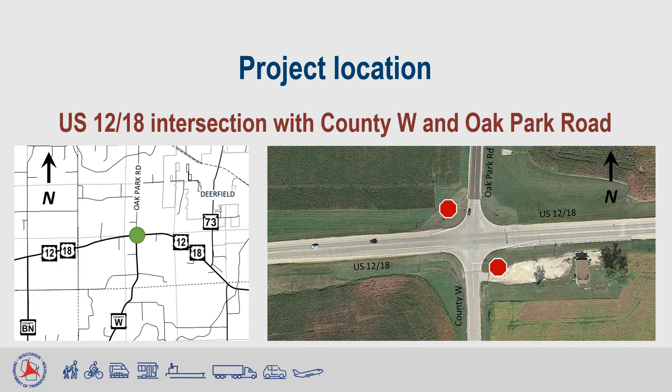The posted speed limit is 55 miles an hour on US 12 and 18 and County W. Oak Park Road has a posted speed limit of 45 miles an hour. The purpose of the project is to improve the safety of the intersection and the traffic operations. There were 16 crashes reported at the intersection from 2015 to 2020. 10 of these crashes resulted in injuries.

The majority of the crashes involved US 12 and 18 vehicles rear-ending vehicles waiting to turn left onto one of the side roads. Right-angle crashes between side street vehicles and vehicles on US 12 and 18 were also prevalent. Factors that contribute to these types of crashes are high speeds on US 12 and 18, failure of US 12 and 18 vehicles to stop for left-turning vehicles, and failure of vehicles on the side street to yield to traffic on US 12 and 18.

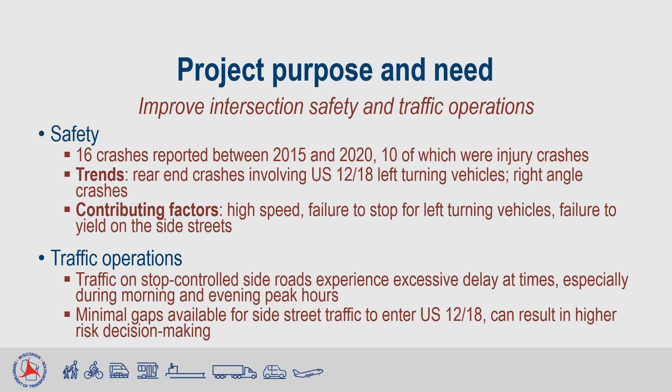In addition to the safety concerns, the intersection has poor traffic operations on the side roads. Vehicles stopped on County W and Oak Park Road are currently experiencing excessive delays at times, especially during the morning and evening peak hours, due to the amount of traffic on US 12 and 18. At these busy times, there are few gaps available for traffic from the side street to enter the intersection, and this can tempt drivers on County W and Oak Park Road to make higher risk decisions to turn onto US 12 and 18. This could also be another contributing factor to the high number of crashes at the intersection.

To improve both the safety and traffic operations of the intersection, the project team completed a study that evaluated 4 alternatives: no action, an improved two-way stop-controlled intersection, installing a traffic signal, and constructing a roundabout.

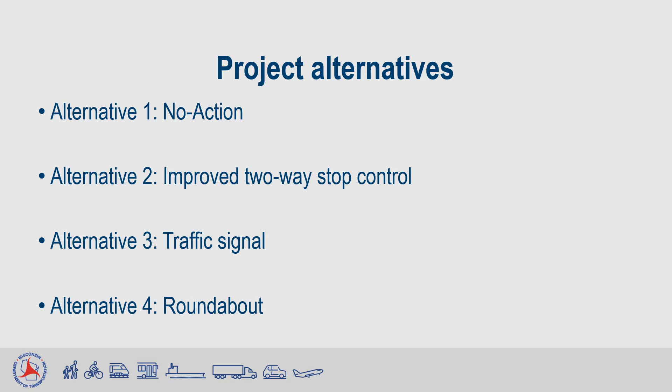The first intersection alternative is no action. If no improvements are completed, the US 12 and 18 and County W Oak Park Road intersection will continue to experience high crash rates with increased likelihood of injuries or fatalities. Congestion will also increase as traffic grows, which will result in longer delays and potentially risky decision-making. Taking no action will not address the identified safety and traffic operation needs of this intersection and is not preferred.

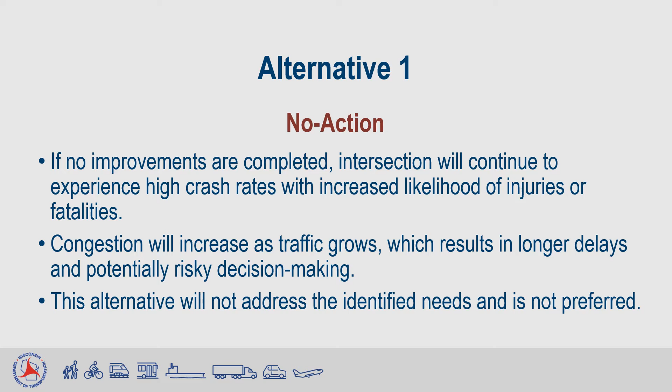The second intersection alternative is to improve the existing two-way stop-controlled intersection. This alternative adds dedicated left turn lanes to both approaches of US 12 and 18 and adds a dedicated right turn lane for westbound US 12 and 18, which complements the existing right turn lane for eastbound traffic. The improvements are estimated to cost $1.6 million.

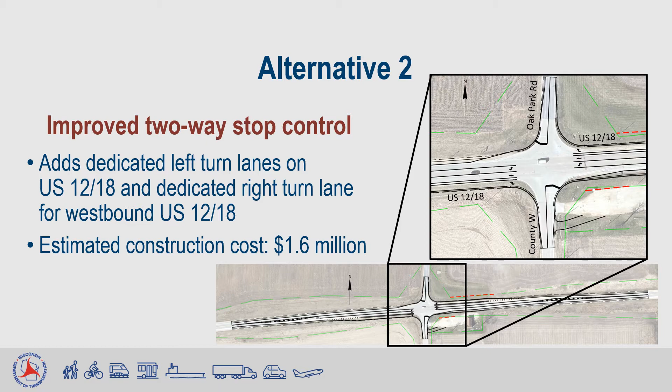Safety performance is predicted to improve for this alternative over the existing intersection configuration, particularly lowering the rear-end crashes. However, due to the high speeds on US 12 and 18, the severity of crashes is likely to still be high. Traffic on County W and Oak Park Road must still stop and will continue to experience high delays and poor operations, which may lead to risky decision-making.

The additional turning lanes on US 12 and 18 will also make the turning movements from the side roads longer, requiring larger gaps in traffic on US 12 and 18. The construction work required on US 12 and 18 to add the left turn lanes still results in a considerable construction cost. However, this alternative is the least costly of the improvement alternatives. The improved two-way stop-controlled intersection alternative does not meet the operational needs of the project and only marginally improves the intersection safety and therefore is not the preferred alternative.

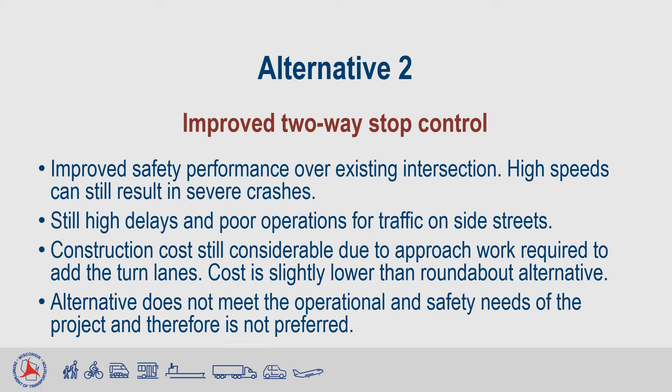The third alternative is to install traffic signals at the intersection. This alternative adds dedicated left turn lanes to all of the intersection approaches and dedicated right turn lanes to the US 12 and 18 approaches. A median is also added to separate eastbound and westbound US 12 and 18 traffic. The improvements are estimated to cost $3 million.

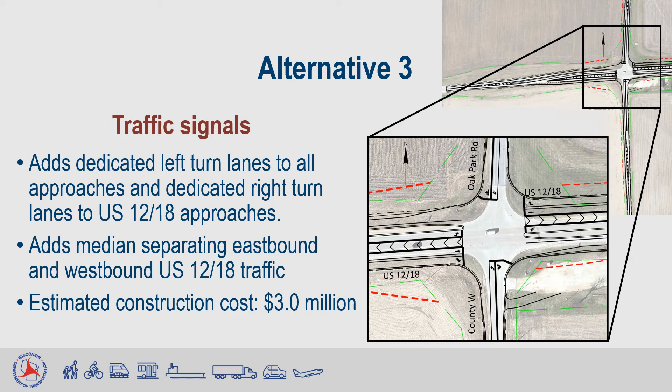With the addition of traffic signals and dedicated left turn lanes, the safety performance of the intersection is predicted to improve over the existing intersection. However, high speeds at the intersection could still result in severe crashes. The traffic operations, especially on the side roads, are also expected to improve over the existing conditions, but queue lengths are expected to be longer during peak periods compared to the roundabout alternative.

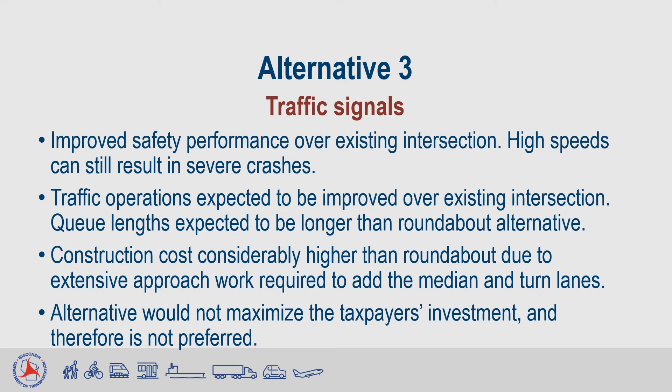The estimated construction cost of $3 million is considerably higher than the roundabout alternative due to the extensive work required on all four approaches to construct the left turn lanes and the median on US 12 and 18. The traffic signal alternative would not maximize the taxpayer's investment and therefore is not the preferred alternative.

The fourth alternative is to construct a roundabout at the intersection, which is the preferred option by Wisconsin DOT. The roundabout would consist of single-lane entries. Roundabouts eliminate right angle, or T-bone, crashes, and minor crashes often involve property damage only. Also, the geometry of the roundabout results in slower operating speeds for drivers, further reducing the severity of crashes.

Recent studies of Wisconsin roundabouts have shown that replacing a stop sign or traffic signal with a roundabout yields a 38% reduction in fatal and injury crashes. Reconstructing the US 12 and 18 and County W Oak Park Road intersection as a single-lane roundabout is estimated to cost $1.8 million.

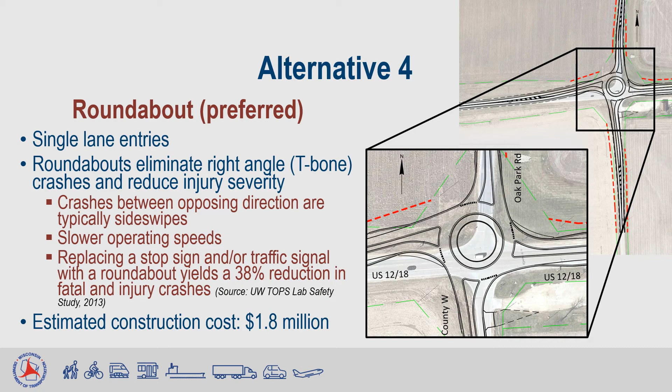With the installation of a single-lane roundabout, the safety performance of the intersection is predicted to improve over the existing intersection and with less severe crashes than the improved two-way stop or traffic signal alternatives. The traffic operations of the roundabout are also expected to improve over the existing intersection and with less queuing than the traffic signal alternative and less delay during the off-peak periods.

The construction cost for the roundabout is estimated to be lower than the traffic signal alternative. The roundabout alternative meets both the operational and safety needs of the project while maximizing the taxpayer's investment and therefore is the preferred intersection alternative.

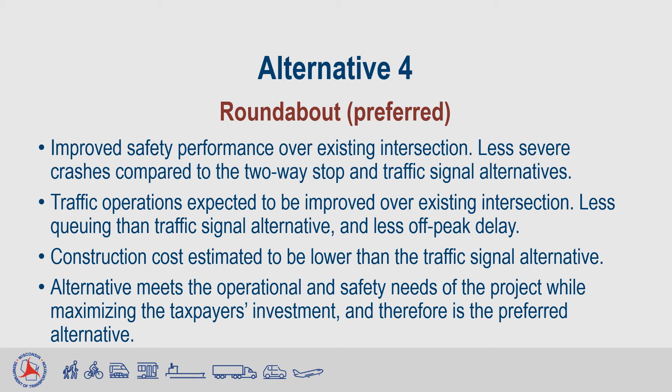Regardless of the selected intersection alternative, strips of right-of-way will be required from parcels near the intersection. Shown here in red are the approximate right-of-way needs for the roundabout alternative. The right-of-way requirements for the other alternatives are shown on the exhibits included on the project website.

The chosen intersection improvement will be constructed in stages, with US 12 and 18 to remain open during construction. County W and Oak Park Road will be closed or restricted to right-in, right-out access at times during construction. Access to local residences and businesses will be maintained throughout construction.

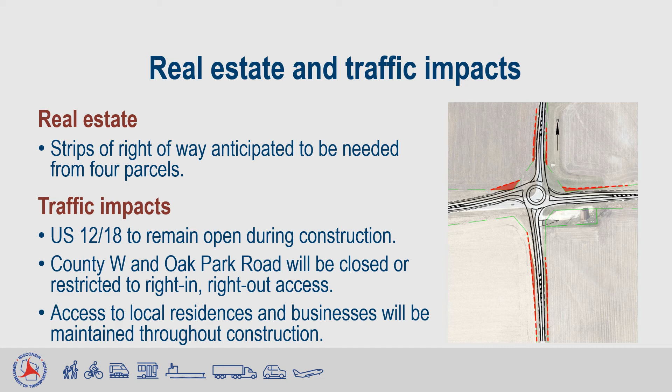During 2022, staff will work on the environmental document and preliminary design. A second public meeting is planned in early 2023 after the preliminary plans have been developed for the selected alternative. The right-of-way acquisition process will begin shortly after the second public meeting. Construction is currently scheduled for summer 2026.